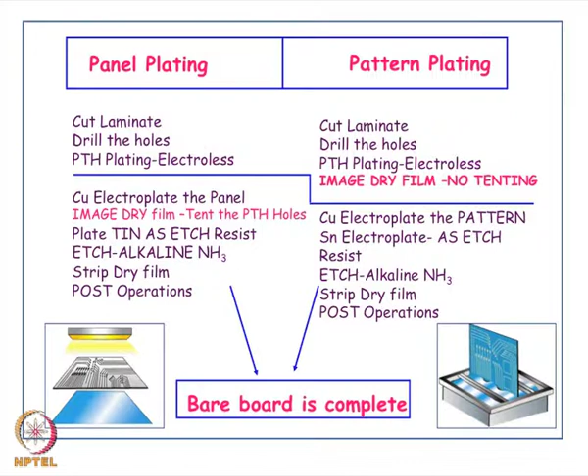What do you mean by a plated through hole? There is a dielectric material, and then you have the copper at the top and at the bottom. Now, we are drilling a mechanical hole. These holes are meant for providing interconnects, electrical contact between the top copper and the bottom copper. When you drill a hole, the inside of the hole wall is a dielectric material, it is non-conductive, so you have to make it conductive.

So, the plated through hole process sequence will let you know how a conductive hole wall is established using a combination of electroless copper and electroplating copper. So, we look at the sequence once again, and this is highlighted through videos.

Now, if you look at the first step, as we have discussed last time, it is the image transfer process. So I let you watch the image transfer, because this is going to be a very important step, whether we are going to do a pattern plating or a panel plating for a double sided printed wiring board. You can see here the board has been laminated with the dry film photoresist material.

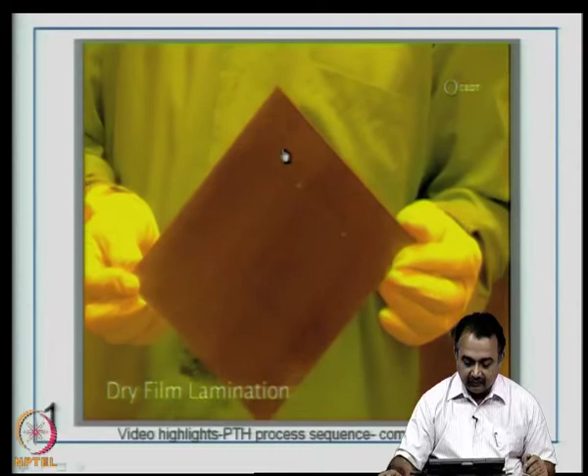Now, remember all the properties that are required to be established before a dry film operation. The suitable masks for imaging the electrical layers are subsequently taken. They are aligned with the through holes that you have drilled, and then they are introduced into the UV exposure unit. You can see this is a UV exposure unit, where sufficient UV light is exposed to the dry film through the mask. Now, this will help establish an image.

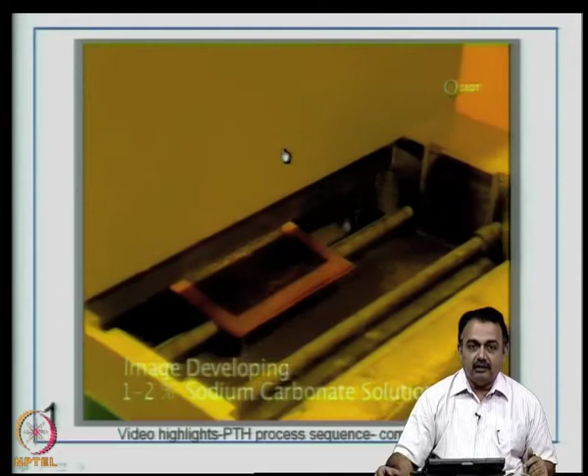Now, this image is further stabilized by the developing process. So, the resist will be removed in the unwanted areas, and the resist will remain on the substrate where the circuit is to be protected, or in some cases where the circuit pattern requires additional copper to be added in terms of increasing the thickness of copper on the circuit areas.

Now, this is the first step, that is the image transfer. Now, we get into the second step of the plated through hole sequence, which is called electroless copper plating. So, once again I emphasize, we are not using an external DC current here. We are using a chemical reduction process from a copper rich solution and using some reducing agents to deposit copper onto the surface of the board as well as the through holes.

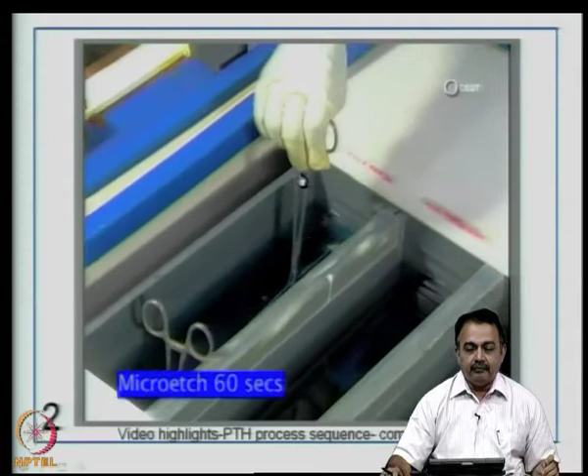Now, before that, if you look at the video, what we are basically doing is a micro etch. This will remove some amount of copper from the surface of the board, to the extent of about 1 to 2 microns. This will provide more roughness, more surface area for the imaging process to happen in a good manner.

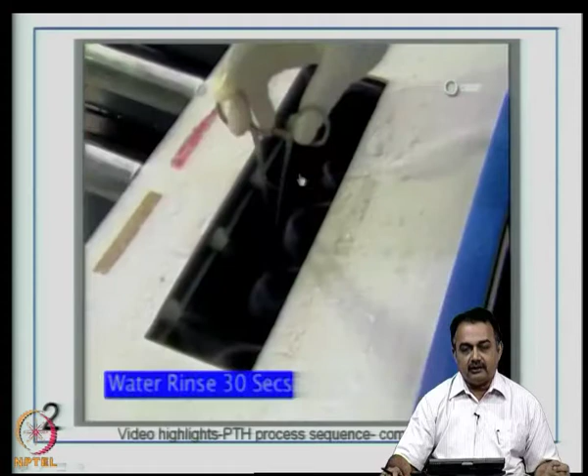Then the next step after the micro etch is a water rinse. Typically, you can use a cascade rinse or a spray rinse, as you have seen here, for 30 seconds. Then it undergoes an acid treatment in a 10% sulfuric acid dip to activate the surface with the acid. Then it is neutralized with water.

So, these are all the cleaning processes. What you are seeing is basically a micro etch, which is a cleaning process, and the sulfuric acid is a cleaning process to remove oxides and other debris that may be on the surface.

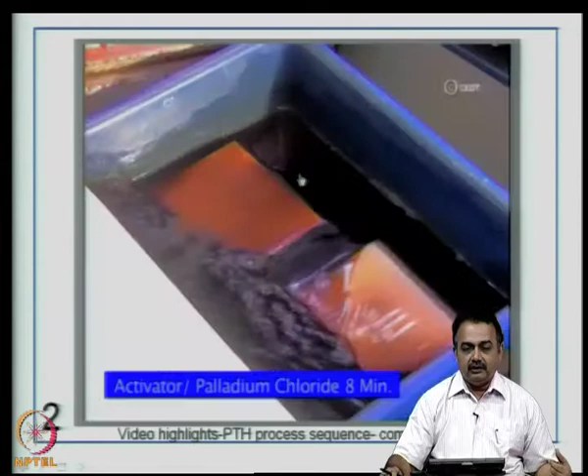Now, we are introducing into a pre-dip. Remember, the next step is going to be a catalyst activator, which is chloride based. So, we now wet the board with a chloride, hydrochloric acid. Now, it is introduced into a tray containing palladium chloride, which is our catalyst.

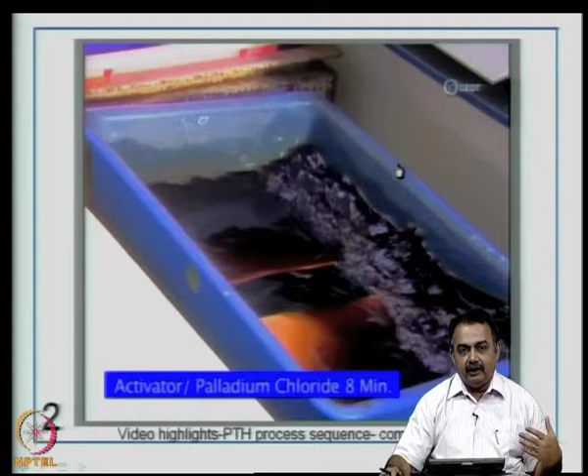You remember the equation that I have put up in the last class, where we described how the palladium is adsorbed on the surface of the copper, and then to the surface of palladium your copper gets attached. It is a strong physical bond, and this again is very key to the reliability of the entire board.

Now, after the recommended time in the catalyst, the board is now washed well, water rinsed for about 30 seconds. Remember, the water that we use here is deionized water, which is free from all contamination like chlorides, carbonates and so on.

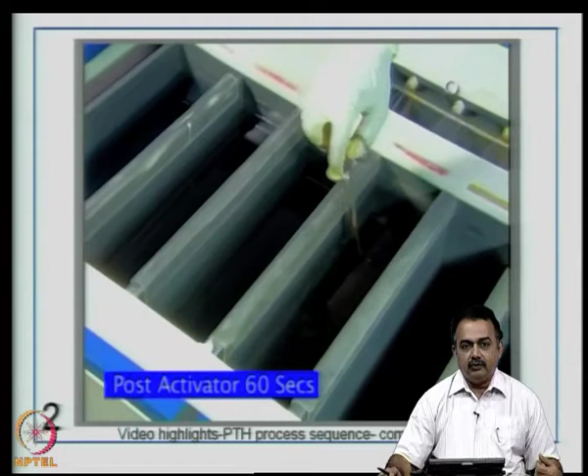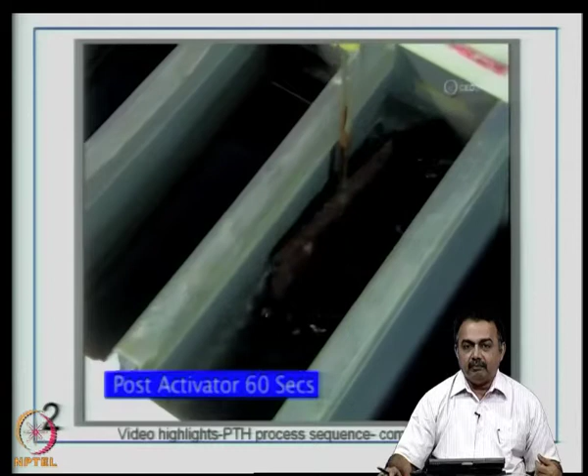It could be an 8-layer multi-layer board or a 16-layer multi-layer board. They have to undergo these critical process steps.

Now comes the water rinse after the post activator. Now the board is ready for activation in the electroless copper bath.

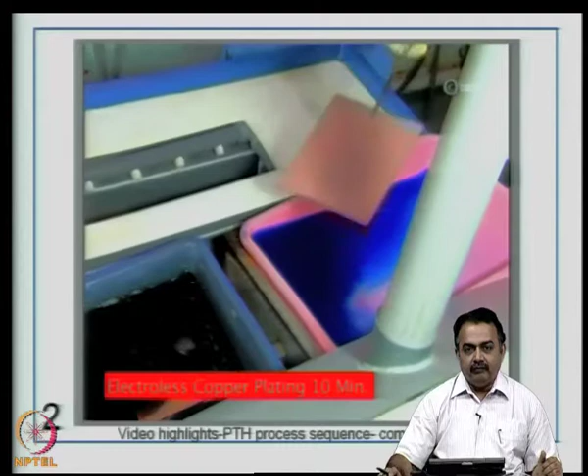If you recollect, this is the electroless copper bath, the blue solution, which basically contains a copper rich aqueous solution, and at the time of usage, the reducing agent like sodium hypophosphite or a hydrazine based reducing agent can be added. There are several reducing agents that can be used based on the recommendation of the manufacturer of the catalyst, because there has to be some compatibility.

Now you can see that the board is plated with copper. This is real nascent copper, it can get oxidized. So the subsequent process has to be immediately carried out, otherwise you have to protect the copper with some kind of anti-tarnish solution or coating.

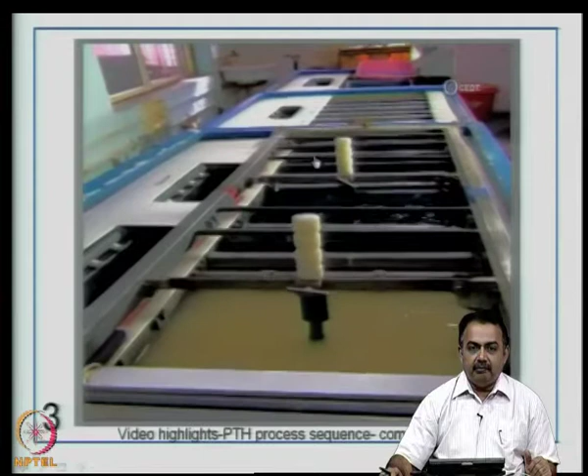Now, the next step in the PTH sequence is the panel plating process, which means the copper panel or the laminate, the entire panel gets plated, whereas in pattern plating, as the name indicates, you will specifically open up those areas to receive plating.

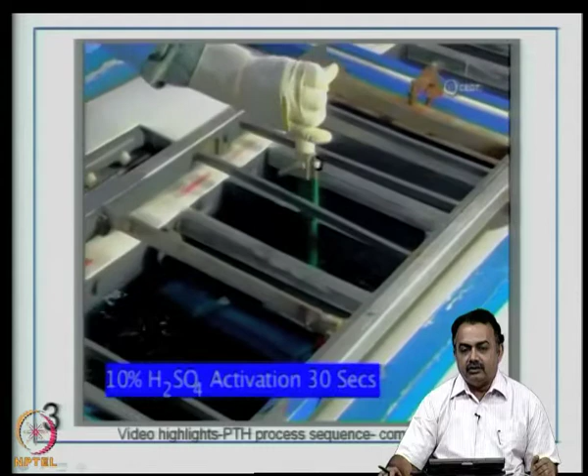Now in the plating process, what you are seeing here is basically a jig attached to the panel for easy handling, and for the copper plating bath, as you know, there is an electrolyte, there is an anode and the cathode. Your PCB acts as the cathode.

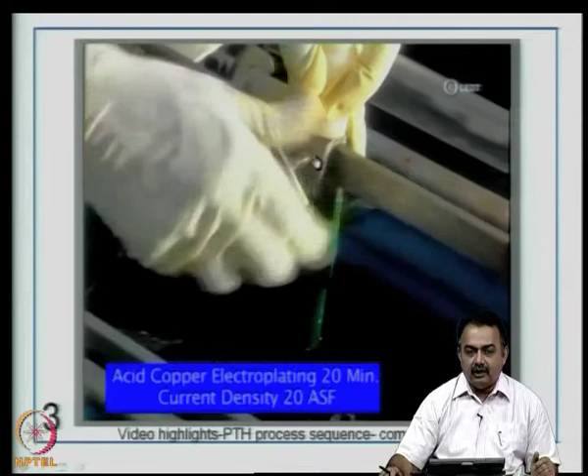Now here you see that the technician is introducing the jig containing the panel, the printed wiring board, which is the cathode, into the copper plating bath, and then the current density of about 20 amperes per square feet is now activated for the plating bath.

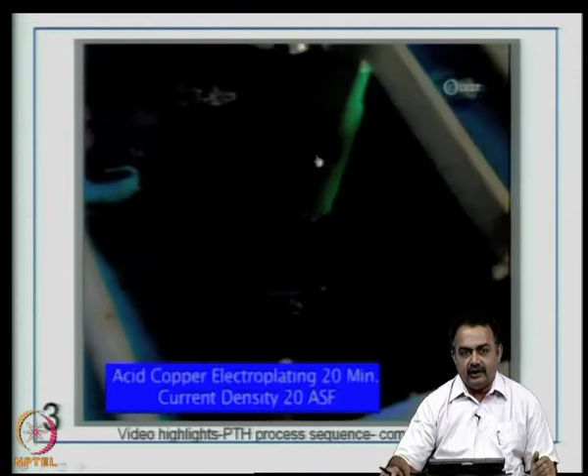So you have two anodes on either side, here as well as here. You have the anodes in a bag, so that you get high purity anode getting into the electrolyte.

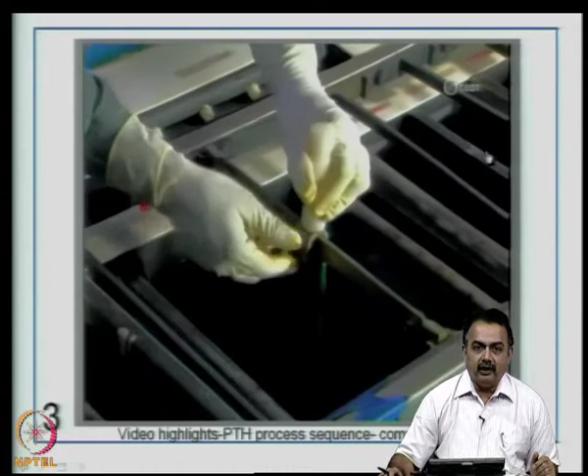Now, after sufficient time, here in copper plating, you have to calculate the area to be plated. There should be constant agitation, there should be good air circulation, and the distance between the anode and the cathode has to be measured, and accordingly you have to set the current density.

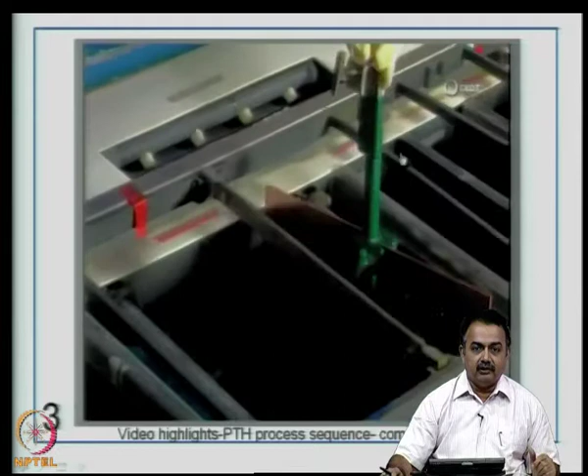Typical guideline is 20 amperes per square feet, and it depends on what thickness you want to plate. Your final thickness, if it is around 32 microns or 35 microns, accordingly based on that, you can see that this panel is very shiny, a good coverage of copper has taken place on the entire surface of the panel.

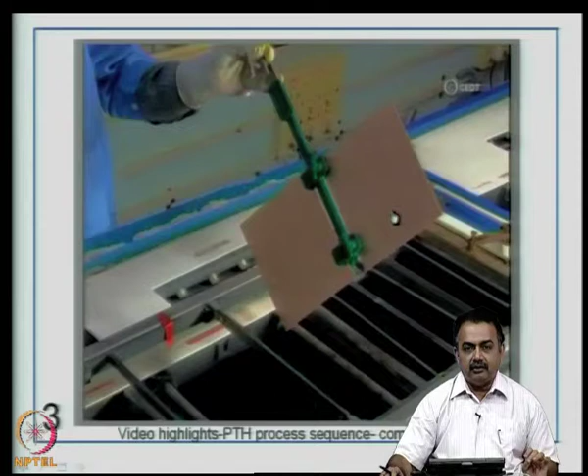And if you go deeply and carefully into the microscope at this stage to look into the through holes, they will be well plated. You can see from a side shot here that the holes are well plated with pure copper. Now, again this is going to be a key step.

As the name indicates, in panel plating the entire board is plated. Now you can do an image transfer on the printed wiring board and then remove the unwanted copper. So you are now going to protect the areas that you require and then leave out the other areas for etching. Now we will go into pattern plating.

So here the difference is that, after the electroless process, you do image transfer onto the panel and then mask the areas that do not require additional copper plating.

So for this particular step, you do acid cleaning first, because the copper that is going to be plated on the circuit areas, the base area needs to be clean for good adhesion of electro copper.

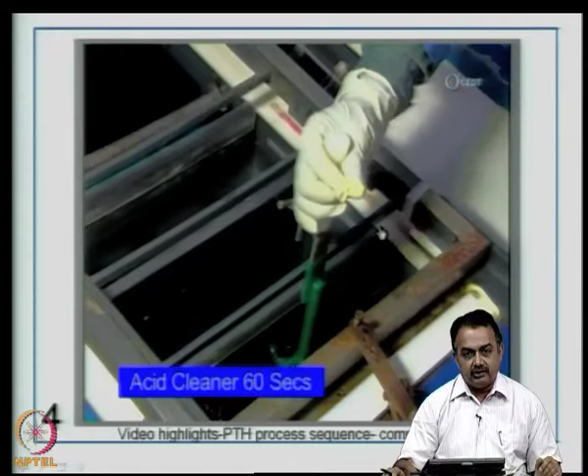During the plated through hole process sequence, you cannot ignore any step which includes a water rinse, acid cleaning, or a micro etch process, as indicated, because if you miss or ignore one of the steps, you will contaminate one chemical into another tank, causing process variations that affect the final yield.

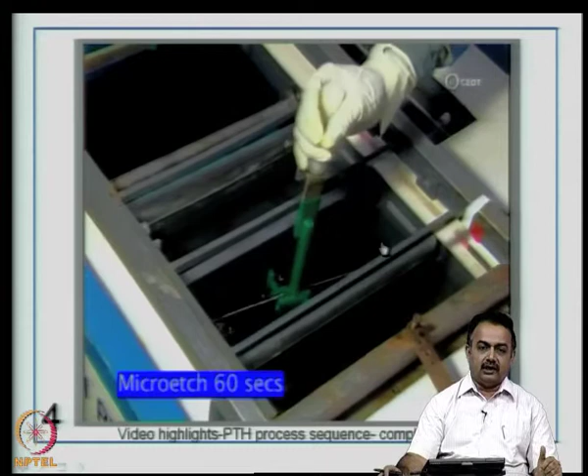You can see here that the exposed copper which is going to receive plating is micro etched for about 60 seconds using ammonium persulfate micro etchant. This is to improve adhesion and ensure the electroplated copper adheres well to the pattern area. The dry film is going to protect the non-circuit areas from receiving copper.

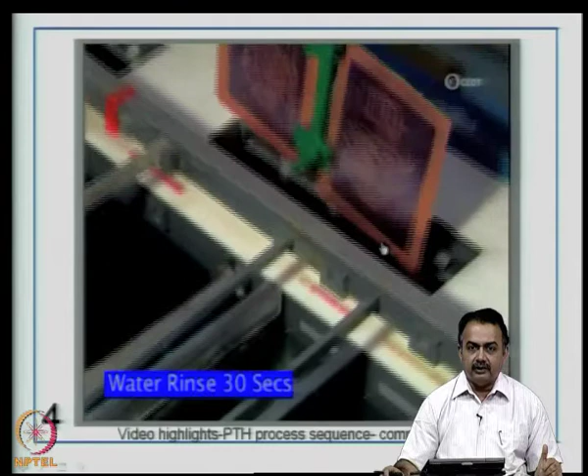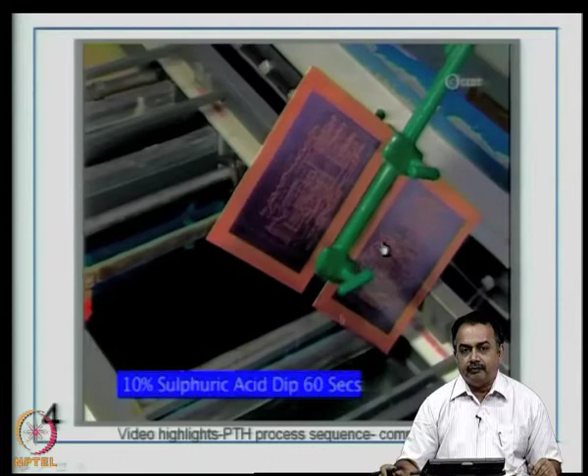Also, we can see in this shot that the panels have a bus bar around the sides, which is for the jigs to hold the panel and also to receive current from the jig, so that plating or deposition can take place at a uniform rate.

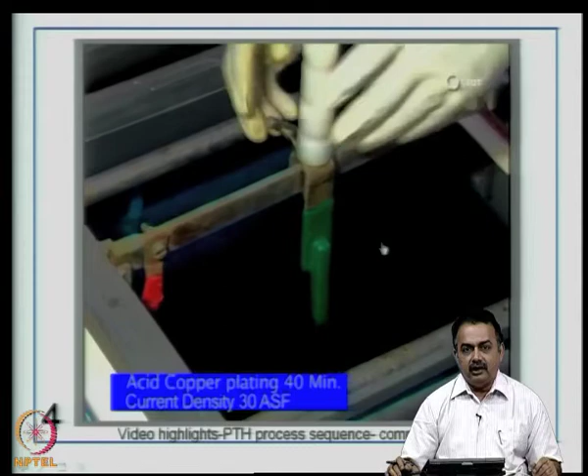Another aspect to see here is the electrolyte, the acid copper bath. Typical timings are about 30 to 40 minutes at 30 amps per square foot, giving about 20 microns deposited. Again, after every process there is a water rinse to avoid contamination.

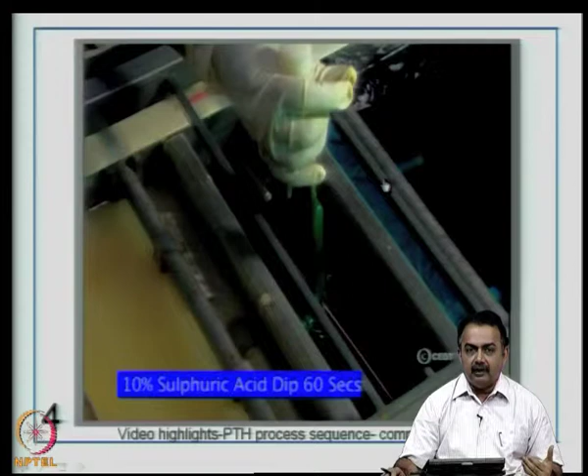This area given around the panel is for the jig to be held and to provide even plating. You have to make sure your electroplating bath provides even plating from end to end along the entire panel. If there is uneven plating, you will have electrical issues finally, because it is not a complete translation of the electrical design.

Now there is a 10% sulfuric acid dip for about a minute or so, and then the copper plated exclusively on the pattern areas is further protected using acid tin pattern plating, with an acid tin plating bath containing a tin-rich source, at a current density of about 20 amperes per square foot for about 20 minutes. Here we are immediately protecting the copper from atmospheric oxidation by tin plating.

You can see that the entire pattern areas as well as the side bar areas are plated with tin. The tin can act as an etch resist in this case. You can see now the tin plated area, and in contrast the dry film area which has protected the non-circuit areas so far.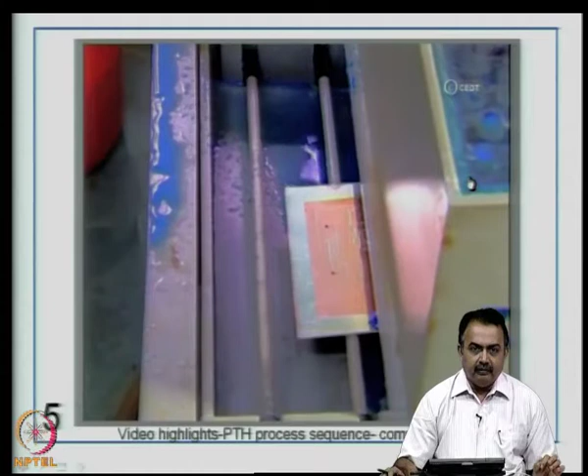The next step is conveyorized alkaline etching using alkaline ammonia, which contains ammonium hydroxide, ammonium chloride, and liquor ammonia, in addition to copper as a catalyst to start with. You can see spray nozzles from the top as well as the bottom going through a conveyorized machine, and there is a water rinse at the end of the conveyorized line.

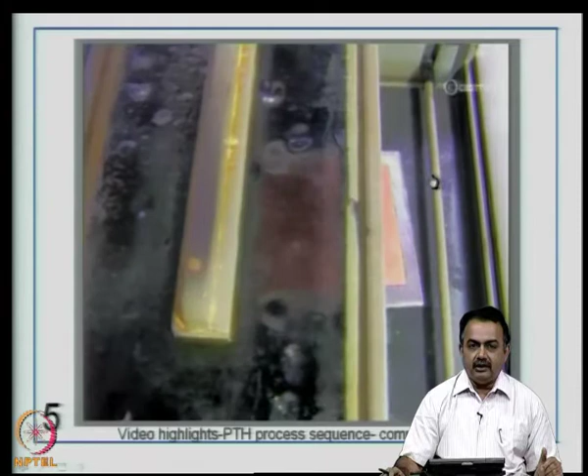In some cases, as you can see in this example, after the first pass the board is not completely etched. You have to set the right temperature, and there has to be complete control of the elements in the alkaline etching bath. The board is now reintroduced into the conveyorized etching machine to further remove the existing copper.

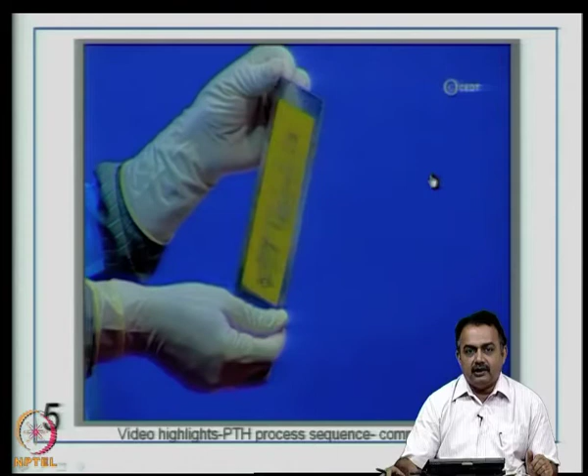In some cases, if it is a long line with a large voluminous tank, you can complete the etching process in one pass, but being a prototype, this is happening in the second pass. You can see the board is completely etched out, with the base laminate visible and the copper pattern areas intact.

So, have a microscopic examination at this particular point to see if the etching process has been completed thoroughly without any undercut. That is a very crucial quality examination that one needs to do.

Now, the particular board has been solder masked. You can use a dry film or a liquid solder mask and then complete the operation, and you can also see that legend printing has been done. On the right side you can see legend print using white inks have been marked.

So this completes basically the plated through hole process sequence for doing a double sided electrical interconnection. Now, you can repeat these steps for a multi-layer board, but at the same time you have to look at final measured thickness. Therefore, you will use thin laminates for inner layers.

Now, what are the post operations that one does after the board is completed? Quality inspection is a must at all stages. I would mark this as very important, because in volume manufacturing you have to inspect the board at every process step. Then solder masking, legend printing using white inks, scoring and routing, because in some cases the panels may have a large number of boards. So, you have to isolate these boards, and then in some cases in the individual boards you may have to perform some kind of routing or opening a slot, that is basically for introducing an electromechanical device or a chassis part into the board. You can do edge chamfering, typically making the board edges

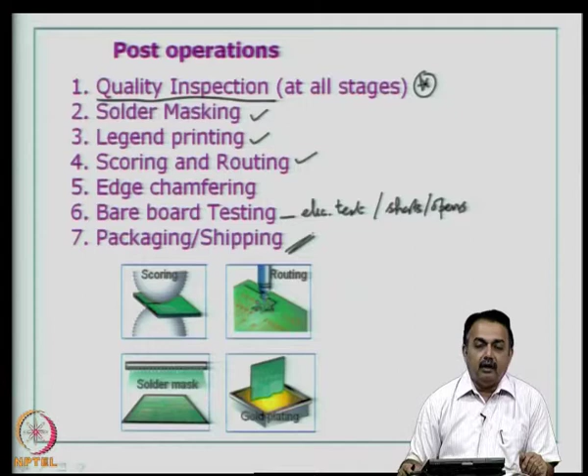So, you have to qualify every single board for all of these quality inspections, including electrical testing, and finally, the board is packaged according to the recommended packaging material and methodology and then shipped.

Now, I mentioned about the plated through hole process sequence. What you will notice is that the board reliability rests on the through hole quality. So, how do I measure the quality of plating and the thickness of the copper plated inside the through hole wall of the printed wiring board?

Obviously, you cannot examine every hole. So, you have to prepare some coupons from probably 1 in 10 panels that will give you an indicator of how your plating bath and how your processes work. PWB microsectioning is one such example where you prepare coupons for testing the quality and testing the nature of your plating process, because that is key to the yield part of manufacturing.

So, I will take you through this video where we show you how to prepare a sample of a plated through hole, which will be used for analysis and also measuring the copper thickness.

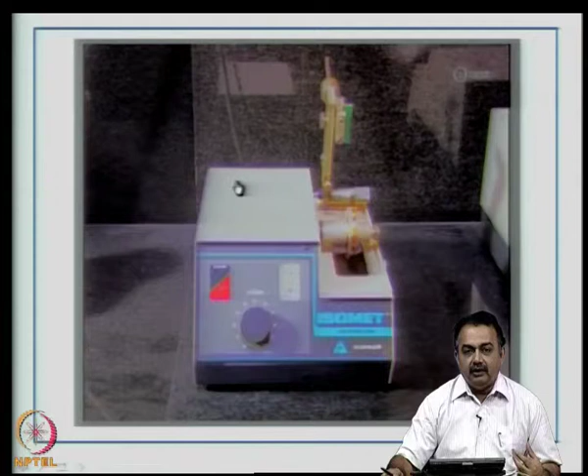Now, basically we will prepare some test coupons using some epoxy material, and then we will zero in on the site where the sample needs to be measured, and then microscopically look at whether there are cracks, whether there is delamination from the base substrate, and the nature of the deposit, whether it is porous or hard, and whether it is having the required thickness.

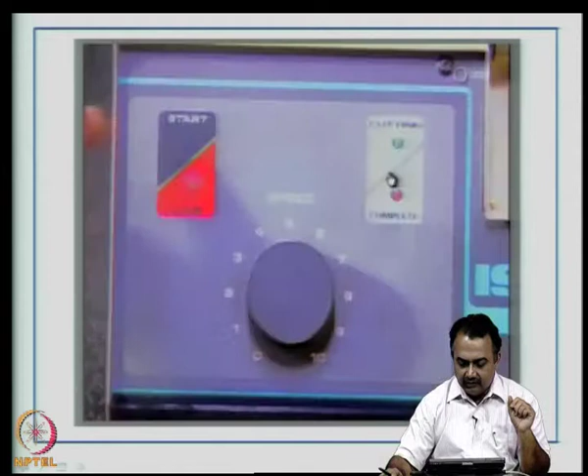You see in this particular instrument, which is basically a sawing machine, where you can see here the PCB, a small sample which contains the through holes has been clamped, and then you can see here that there is a saw, typically a diamond saw, that is activated. There is a liquid here, typically water, to remove the heat while the sawing cutting process is on. The board is introduced to the saw.

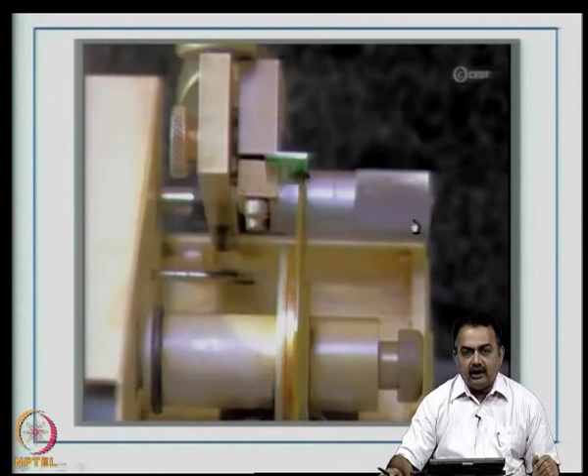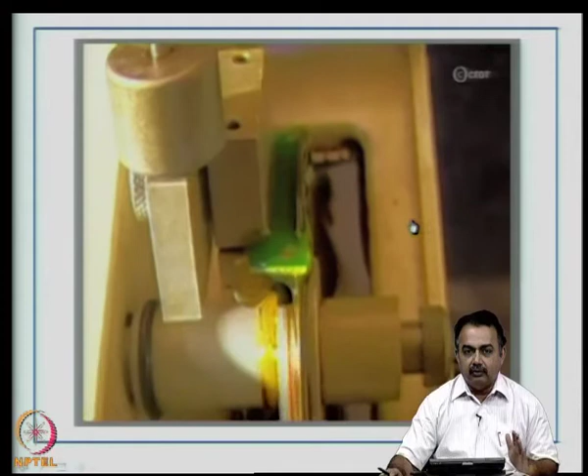Now, cutting takes place at slow speed because you do not want to damage the sample, and the cutting is now taking place typically at the through hole, right near the through hole. So, you do not want to damage the through hole, you are going to cut this very close to the through hole, and then using polishing methods you are going to approach the site.

Here you can see that the technician is introducing the PCB which contains the through holes. You can see the through holes into a template.

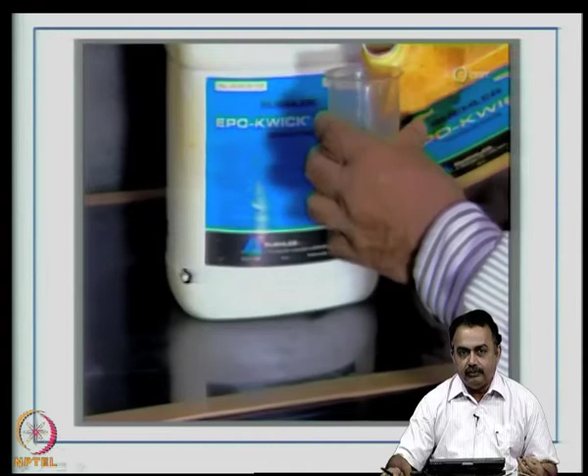Now, you can see here this is a template which is now introduced into a container, and here you can see we are now mixing an epoxy material, and on the right a hardener is being used. Based on the recommendations of the manufacturer, epoxy and its suitable hardener is mixed thoroughly without air bubbles and slowly introduced into the plastic container which contains the printed circuit board coupon.

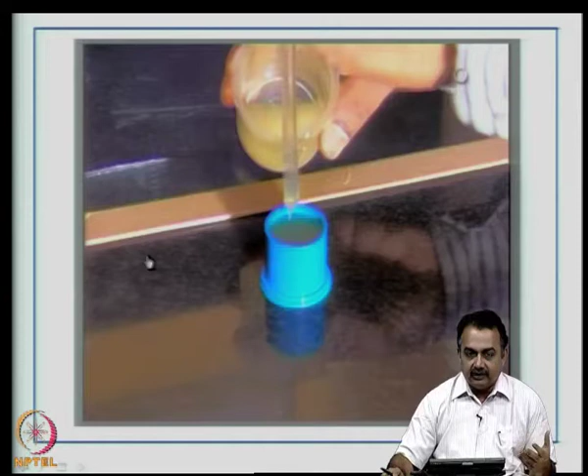Now, here you have to make sure that you do this process very slowly. A lot of heat will be generated. This is an exothermic reaction, and you have to introduce the epoxy material slowly into the container to make sure that there are no air bubbles. Typically, you can keep the epoxy material to stabilize enough after it is mixed for about 10 to 15 minutes and then introduce into the container.

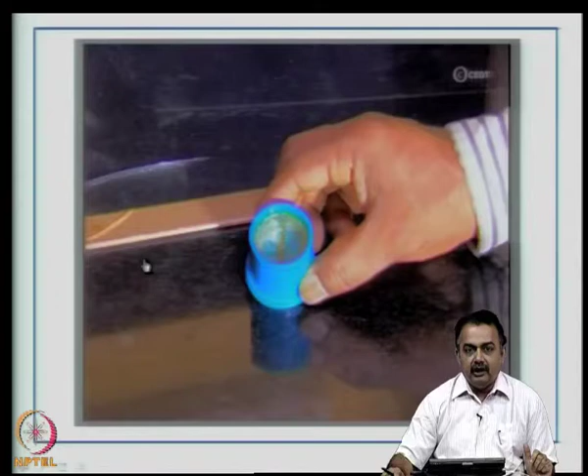Now, this is a quick set polymeric material. It will set quickly in about an hour. Now, you can see here that the coupon has been completely set. You can now release it from the container. This sample which is embedded in this epoxy, you can see here that the PCB is now embedded into the epoxy coupon. This is called a potting process using an epoxy, or you can say this is a cross section sample.

We are now at the intermediate stage of looking at the site where we want to measure the copper thickness.

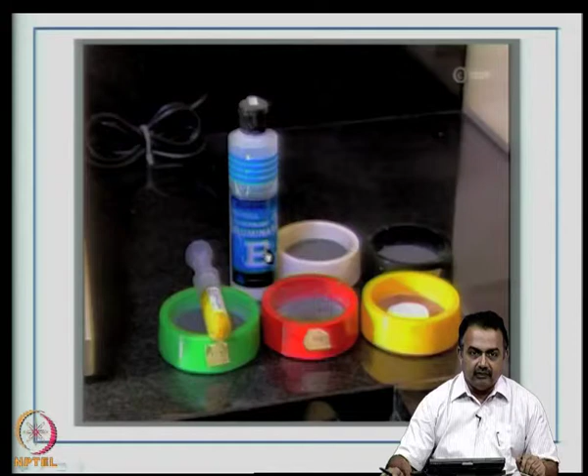Now, after this process is over, we now have to polish the sample to get close to the area. We are looking at a few micron thickness. Therefore, the polishing process from that raw coupon has to be very slow. So, here you can see there are various materials used, typically emery paper of various grades that we normally use for polishing, but here we have to go from coarse to less coarse and more fine emery paper material, and you can also use some kind of slurry, alumina silica gel, for example, to aid you in the polishing process.

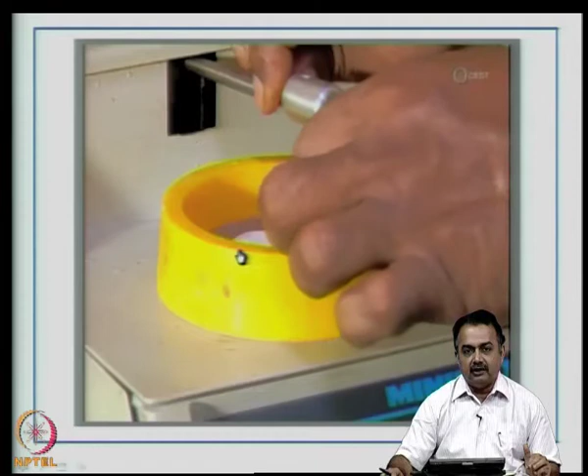So, this container which contains the emery paper also holds the sample that we have just prepared, and then using some kind of slurry, typically water, and you can see here alumina silica gel is now introduced and then continuously polished at very slow rates or at high rates initially, and then slowing down the rate of polishing.

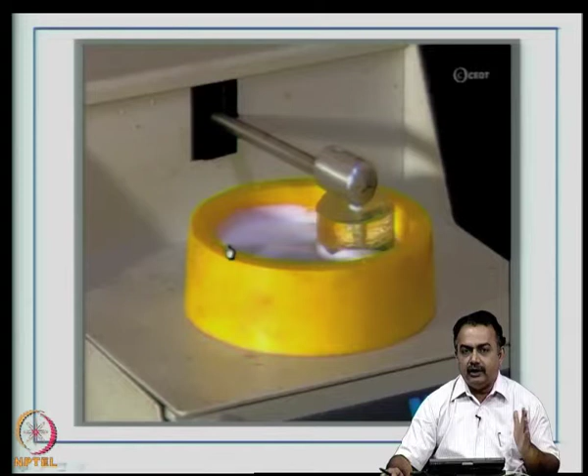Here you can see the surface of the coupon as was done after the coupon was released from the plastic container. Now, after polishing, you will slowly approach the PTH area. You can see here very carefully the two plated through holes and the copper very clearly visible to the naked eye, and you can now introduce it into the various microscopes that you might have and also measure the diameter as well as the thickness.

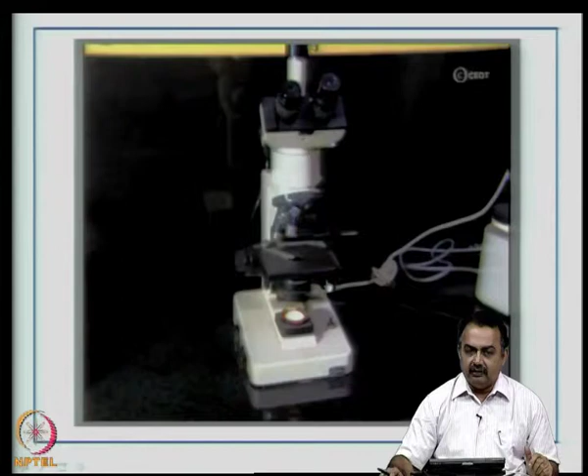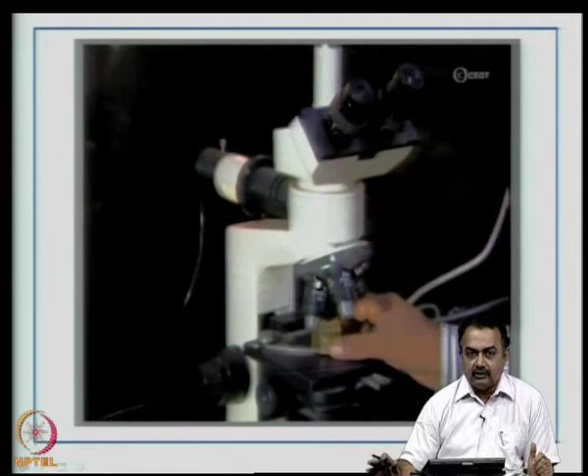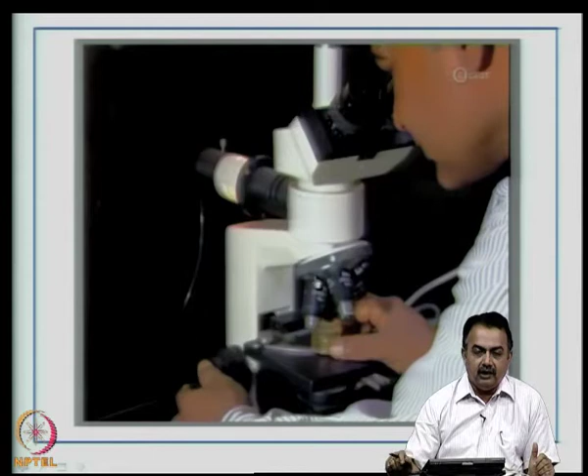So, typically this is an important and a must process in volume manufacturing also. When the drilling process starts for certain panels, they will drill these coupons of various drill sizes, and then the quality team will have to do samples for each of these coupons or earmarked areas, and then they have to report back to the manufacturing line about the quality of the deposit and how much tighter control they have in the deposition rate, because here the electrical performance is going to depend on the thickness of the copper deposit that the manufacturer can provide you, because you can't plate too much thickness of copper more than necessary, and also you can't have lesser thickness other than specified.

So, these videos have given you highlights about the stricter quality control that is established in today's manufacturing process, which the designer should be aware of.

Now, we look at the post process, for example, solder masking on bare copper, it is called SMOBC. Now, you have protected copper with tin, but tin is not a good base for applying solder mask. It can peel off because the surface of tin is very smooth, it does not provide good adhesion. So, typically some people opt for applying solder mask directly onto the bare copper after treating the copper sufficiently to hold the solder mask.

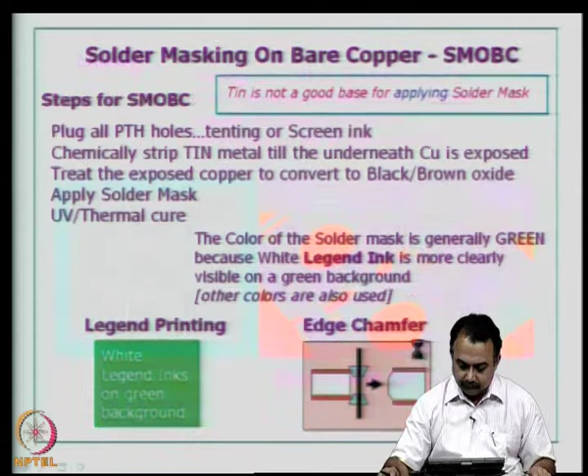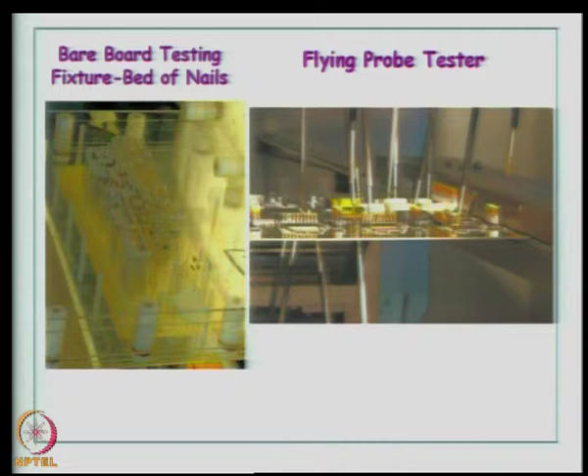I talked about bare board testing. On the left, you see a bed of nails, used by all manufacturers as a compulsory test for qualifying every single board. What does this mean? There is a circuit pattern for your board dictated by your net list. Based on the nets, they produce a bed of nails. You can see the long protrusions - these are stainless steel pins or nails that depict your circuit pattern, done on a plastic mold, typically polycarbonate, and then your board will sit on this bed of nails.

Based on the through-hole coordinates, they perfectly snug fit into the bed of nails, and then you look at parameters like shorts or opens on your test board by applying a small voltage. You activate the board to get information about which nodes or parts of the nets are open or shorting. You mark those areas, and if this is a consistent or persistent defect, there is some process defect which can be identified, and the information passed on to manufacturing for identifying and rectifying it. Otherwise, repair can be done for very small defects, like a lift off, or a broken line due to improper handling during manufacturing.

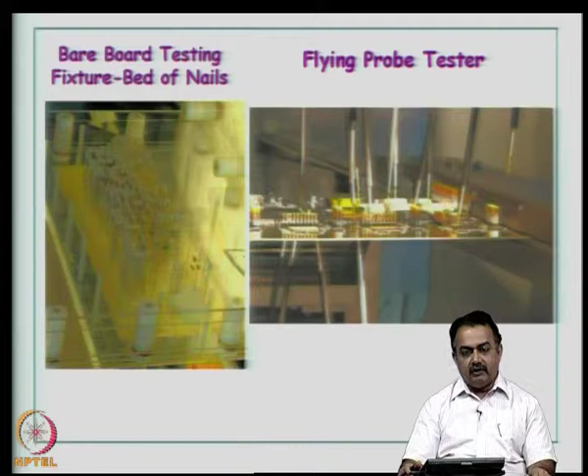This has to be a very slow process, and again there is a hindrance in terms of components mounted - accessibility is a problem. You can do it simultaneously at both sides of the board, as you can see here, using different probe points simultaneously to check a particular net and see the failure at different places. So these are equipments used, one on the left at the manufacturing site of the PCB, and on the right in the assembly segment.

In general, board finishes will be either a solder finish, where you can expect electroplating of tin, since tin-lead is not being used or recommended today. So solder finish using electroplated tin is an accepted process, or you can have a finish with gold. When you plate gold, you have to plate an undercoat of nickel and then plate gold on the nickel to prevent gold diffusion into copper. Today, electroless nickel gold is a popular process in many countries, and the thickness is well controlled by this process. So the board is now ready for assembly.

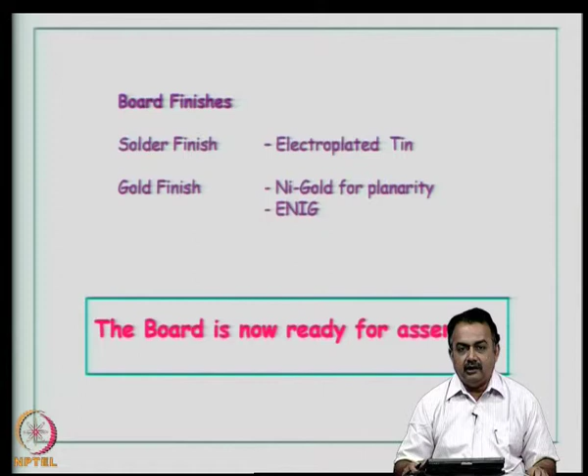Now we will look into some aspects about multi-layer boards. We have seen so far double sided boards. Multi-layer boards, or laminated multi-layer structures, are made by stacking separately made layers and pressing them into a monoblock in a multi-layer press. So you can have a double sided board and another double sided board, introduce them into a multi-layer press, separate them by a dielectric material called a prepreg, and then press them in a multi-layer press to get a 4-layer structure at the required thickness.

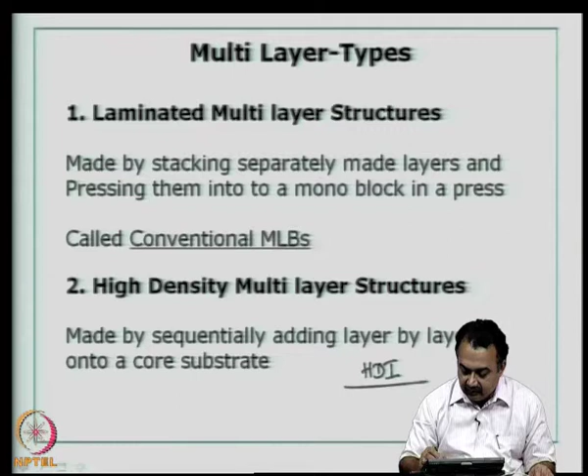These are called conventional multi-layer boards, because today you have what is known as a high density multi-layer structure, made by sequentially adding layer by layer copper and dielectric onto an existing core substrate. This basically leads to what is known as a high density interconnect structure. You are aware of this term, where we are typically talking about an existing core layer - it can be a 2-layer board - and then you add one layer at the top, maybe another layer at the top, then a dielectric and another copper layer. So you can have 5 layers built by sequentially adding copper and dielectric material.

For the construction of laminated multi-layer structures, the key raw materials are: thin core laminates, with typical dimensions from 0.5 mm to 1.5 mm; prepreg material at 0.5 mm or even down to 200 microns, so 0.2 mm to 1.4 mm - these are based on the final dimensions required as per your design; and treated copper foil, because as you build the multi-layer structures you are introducing copper foils in some cases, or you can also add copper by plating. Typical thicknesses are from 10 to 35 microns, again dependent on the electrical design specifications.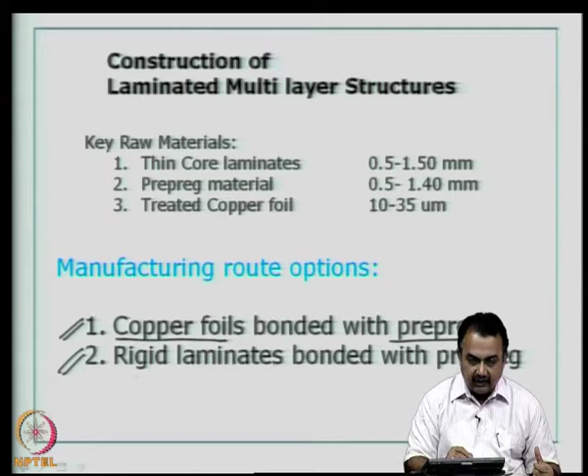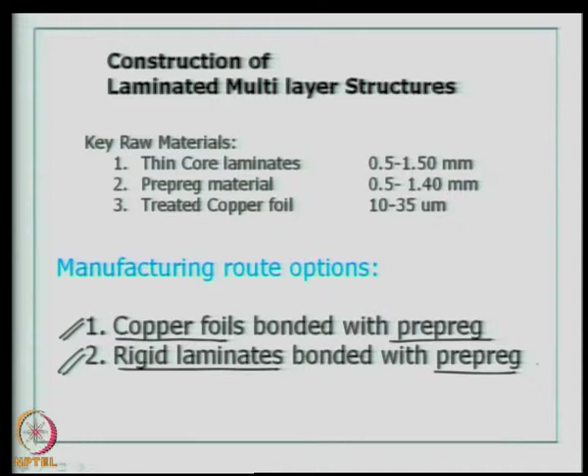The manufacturing options are: first, copper foils will be bonded with a prepreg material - this is the conductor and this is the insulator. These will be introduced into the multi-layer press along with the core, and layers can be increased. The second point is using rigid laminates bonded with a prepreg material. We are going to see both of these options. In this second case, using rigid laminates, let us say a 4-layer board is introduced with 2 prepreg layers, one on top and at the bottom, and then you can have copper foil on both sides to get a 6-layer board.

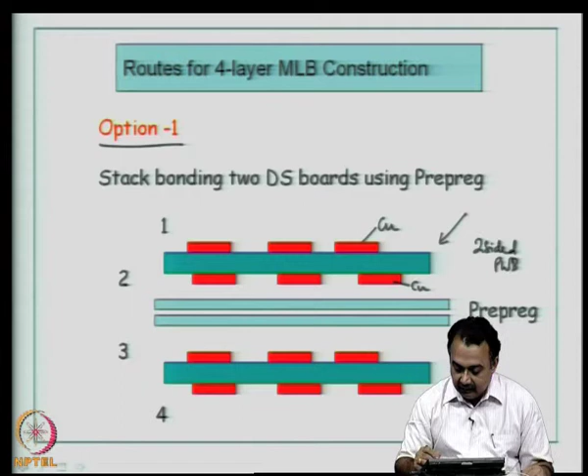Let us look at a case study or example for a 4-layer multi-layer board construction. Option 1: the first thing here is stack bonding 2 double-sided boards using a prepreg material. Assume that you have done this part. This is a double-sided board - you can see here there is copper, and here there is copper, and this is a two-sided printed wiring board. Similarly, this is another two-sided printed wiring board, done as per the process we just described - here is the copper, here you have the copper.

Now the design has been done in such a way that if you introduce these two layer boards together using a set of prepreg materials - in this example I have shown two prepreg sheets, with thickness varying from 200 microns to, let us say, 500 microns for each - you introduce them, stack them together, and send it to a multi-layer press.

Now the epoxy will melt and the boards will nicely sandwich between the two double sided boards. Later, you can introduce a through hole from the top to the bottom to interconnect layer 1 to layer 4.

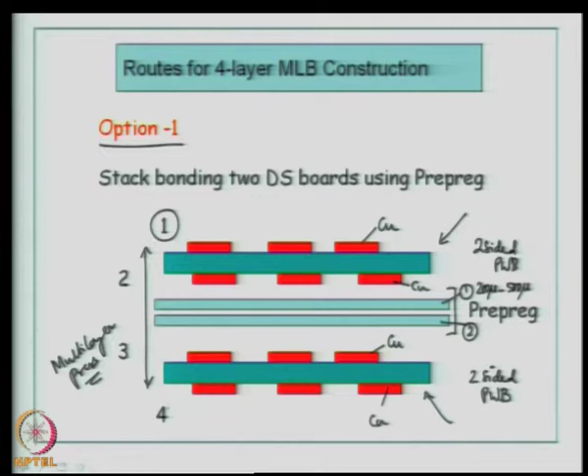You can also build copper on one side by adding the dielectric material, or do the imaging process at the top and bottom layer after the drilling process is over. For example, to interconnect layer 1 to layer 4, you drill a through hole, make it conductive, and access from here to here using a plated through hole process sequence. These are the design variations which can be clearly explained to the manufacturer as to what you require.

The second option is to do a stack bonding of a double sided board and add copper foil for the final two layers. In the first case all your imaging is complete, and here we are talking about a double sided board with copper and dielectric material. Imaging is complete, and we introduce the pre-preg material, then copper foil, and another copper foil. It is now sent to a multi-layer press, where at the required temperature and pressure there is good bonding.

Now you can again introduce a through hole. You do imaging here, image your copper areas at the top and bottom, and establish connection between layer 3 and 4 as notified. Here again you do a dry film process, and pattern plating if required. It depends on the copper foil thickness, typically very thin, then you add enough copper to create the required copper thickness top and bottom.

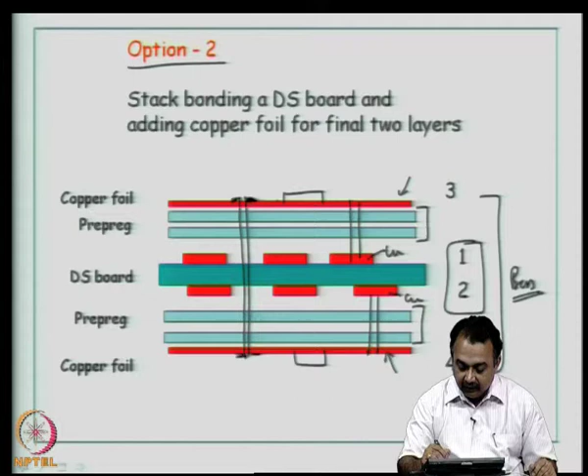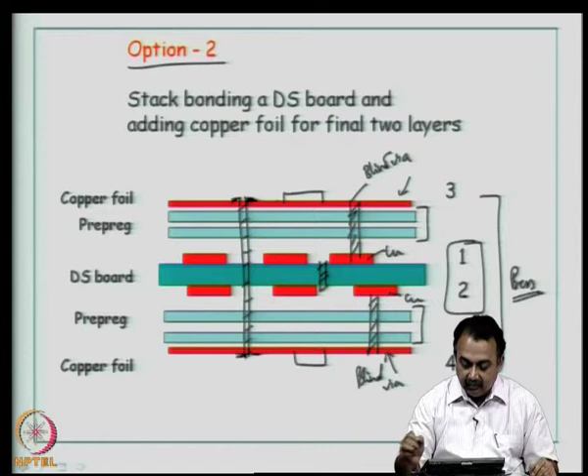You can also establish connection between layer 1 and the inner layer of copper, make it conductive, and this whole wall can also be made conductive. So this is a through hole, this is typically a blind via, this is again a blind via, and here you may have through holes which will now become a buried via. These are the various schemes.

So in a nutshell, what are the major steps in creating a 4-layer board? Process a double sided board, let us say a 0.8 mm core. Your starting double sided board will be 0.8 mm. Now you lay a 0.4 mm thick pre-preg on either side, so it is almost 1.6 mm thickness. Then you add 35 microns of copper on top of the pre-preg on either side, which completes the copper construction.

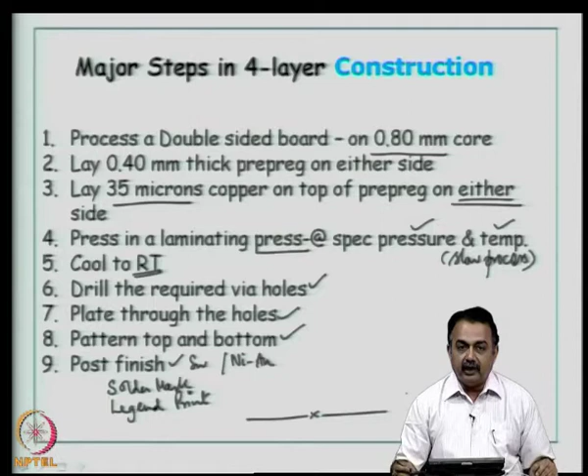Introduce it into a lamination press at specified pressure and temperature, a very slow process. Cool it to room temperature, drill the required via holes to connect the top and bottom, then plate the through holes through the sequences mentioned earlier, pattern plate top and bottom, and post finish using tin or nickel gold. Then it goes for solder mask, then legend printing. This is the kind of steps you look at as a designer for how your 4-layer board is going to be manufactured.

Having seen the basics about double sided boards and multi-layer boards, we will now slowly get into the topic of high density interconnects.

The interconnect hole formation, as you have seen, is basically by through hole, buried or blind vias. They are typically done by mechanical drilling, but here there are certain limitations, basically the size of the drill bit and the size of the via you can drill. Today's modern equipment can drill safely up to 0.3 mm or 300 microns, but below that, say 0.2 mm or 200 microns, it is expensive because the drill bit is expensive, and the equipment also becomes expensive because of the high RPM required for lower drill bit sizes.

But today we have mechanical drilling equipment that can drill up to 0.125 mm, 125 microns. So a lot of quality control is needed, especially if you want to plate a through hole with high depth. When using lower drill sizes, you have to make sure the thickness is small so you can maintain the aspect ratio. The other option available today for building high density interconnects is to use laser drilling and do away with mechanical drilling.

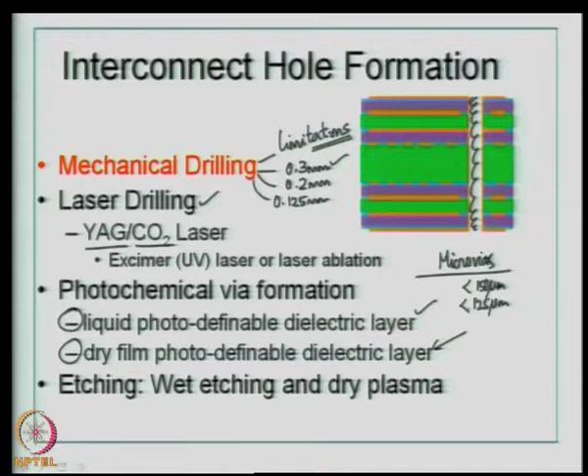So the methodology for micro vias can either be laser drilling or photochemical via formation. There is another method called wet etching, but it does not produce the kind of results that we expect for these kind of high density interconnect structures.

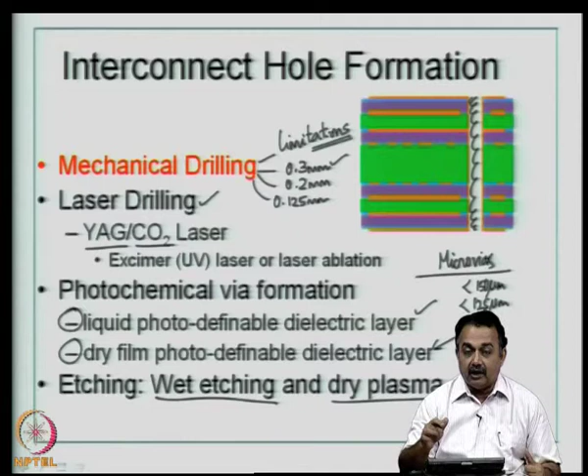Plasma, using a dry plasma etch, has been tried in prototyping. It produces better results in terms of the hole wall definition and the kind of undercut. When you talk about etching, there is always a problem with undercut, and wet etching produces high undercut compared to a dry plasma etch, but it is a very slow process.

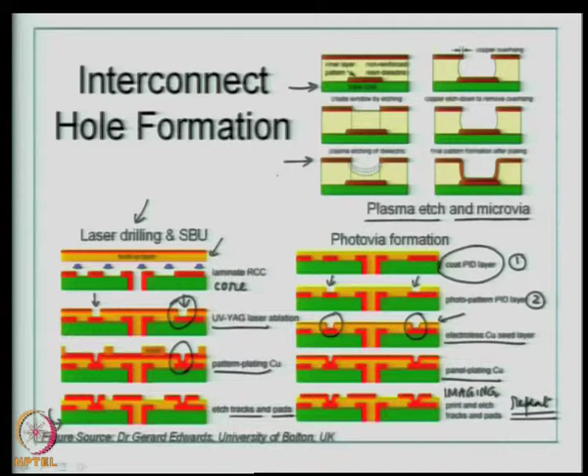Basically the plasma is generated in a chamber where, for example, you have two gases, let us say CF4 and oxygen interacting together, and you get a plasma from the resultant free radicals or ions at higher frequencies.

Now these resulting ions or free radicals will react with the dielectric material, and basically it is a slow process, but you can see the material is ablating, the dielectric material is removed here, and then the copper etching is done basically to remove the kind of protrusion that the plasma etch has not taken care of.

Now you can do a very quick copper etch and then you get a perfect hole wall, and this is finally converted into an interconnect by plating.

You can do electroless plating followed by an electroplating to get a well defined hole wall. So this is a very good description about plasma etch and how plasma can be used.

This is a dry plasma etch process to create a microvia, and following the creation of the microvia it goes into the layer formation by addition of electroless copper and electroplating copper.

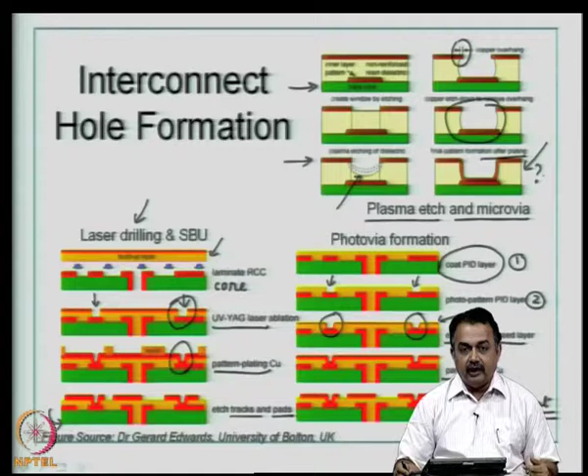So the summary here is the interconnect hole formation for high density interconnects can be done by mechanical drilling in one case, but for vias which have a smaller diameter, people are going in for laser drilling process, plasma etch, and photo via formation. As I said before, mechanical drilling to the extent of 125 microns is currently available, although expensive, and if you include that, these are the four major methods to create a microvia.

The basic reason is that mechanical drilling has its own limitations, because the minimum hole diameter you can create is 0.15, registration is a problem, and debris and smear generation during drilling can block the holes. You need proper hole wall preparation before electroless plating.

The economical aspects, it has got low yield because you are going to depend on sequential drilling process and it can take time.

Whereas the processes like laser drilling and photo via formation especially is a parallel process. Although laser drilling is a sequential process, photo via formation can be very economical and it can increase the yield because it is a parallel process.

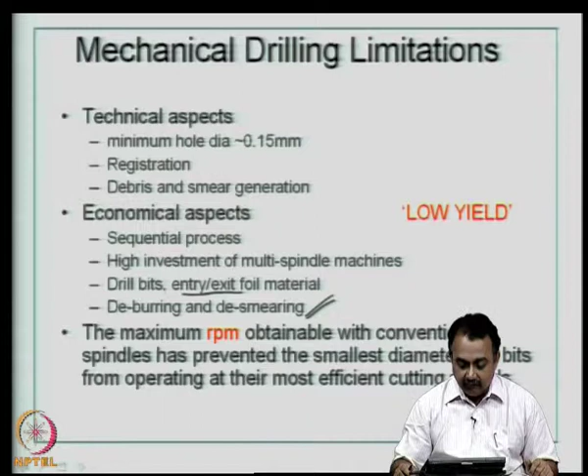High investment is required for multi-spindle drilling machines. Drill bits are expensive. You have to use entry and exit foils. Deburring and desmearing is a very important operation to remove the debris and prepare the hole wall conducive for electroless plating. And the maximum RPM obtainable with conventional spindles has prevented the smallest diameter drill bits from operating at their most efficient cutting speeds, which results in breakage of drill bits and so on.

So we will now look at in the next class a comparison of all of these various methods to create microvias and look at how actually you build high density interconnect structures from a given core substrate.